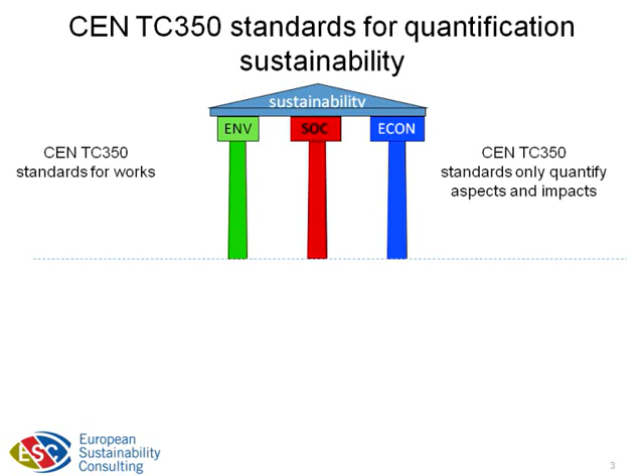But first this. If a building doesn't meet the needs for use, then the building and all products and materials in the building envelope and inside cannot be sustainable. Sustainability also starts with fulfilling the basic work requirements. The European Construction Products Regulation 305/2011 defines 7 basic work requirements.

If, for example, the first basic work requirement, mechanical resistance and stability, is not fulfilled, the building collapses or deformations hinder the functioning of the activities in the building. Then all products used in the building construction and in the building interior are no longer sustainable.

If the building or part of the building, for example, catches fire because basic work requirement number 2, safety in case of fire, is not fulfilled, all sustainability efforts for building and products become worthless. So, sustainability starts with the basic work requirements, with a good functional and technical design and construction.

But once the functional and technical design is made and realized, this has an impact on the environment, on the society and on the economics. Sustainability is based on the solutions for meeting the functional and technical needs measured in 3 dimensions: environmental performance, social performance and economical performance. The CEN TC350 standards allow measuring on these 3 dimensions of sustainability.

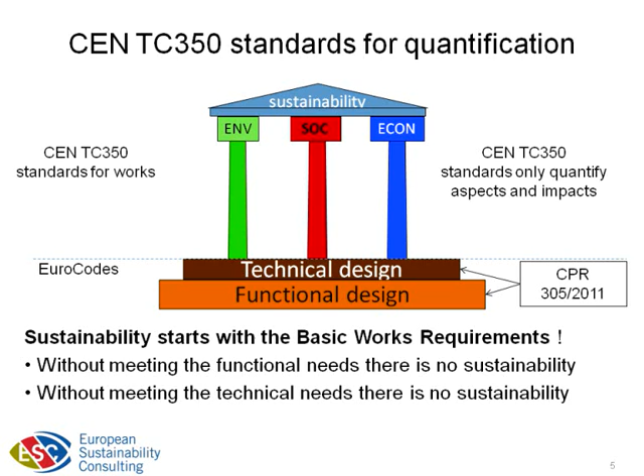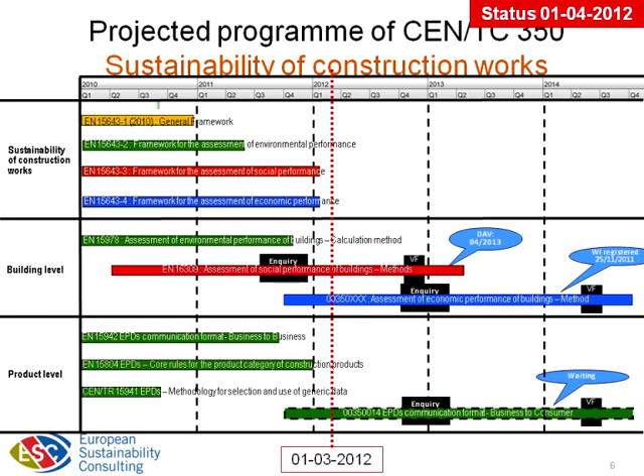The standards do not define what is sustainable and what not. They do not classify or give ratings, they only quantify. As of March 2012, there are 8 standards published. The Standardization Committee CEN TC350 is still working on 2 standards, the methodology for quantifying the social performance of buildings and the standard with the methodology for quantifying the economic performance of buildings. One work item, developing a standard defining the business to consumer communication, is not yet activated.

More in detail, all 4 framework standards are published. The standard EN 15643 Part 1 is an overall general framework standard for the sustainability assessment of buildings. This standard provides a framework with principles, requirements and guidelines for the sustainability assessment of buildings. It focuses on the general principles and requirements for the assessment of the environmental performance, the social performance and the economic performance of a building.

This standard, EN 15643, is part 2 of the framework standards. It provides principles, requirements and guidelines for the assessment of environmental performance of buildings. In the drafting of this standard, the ISO standards 21930 and 21931 Part 1 have been taken into consideration.

The third framework standard in the suite of European standards provides the specific principles and requirements for the assessment of the social performance of buildings. Assessment of social performance is one aspect of sustainability assessment of buildings under the general framework standard EN 15643 Part 1. And then there is part 4 of this suite of European standards. EN 15643-4 provides a framework with principles, requirements and guidelines for the assessment of the economic performance of buildings.

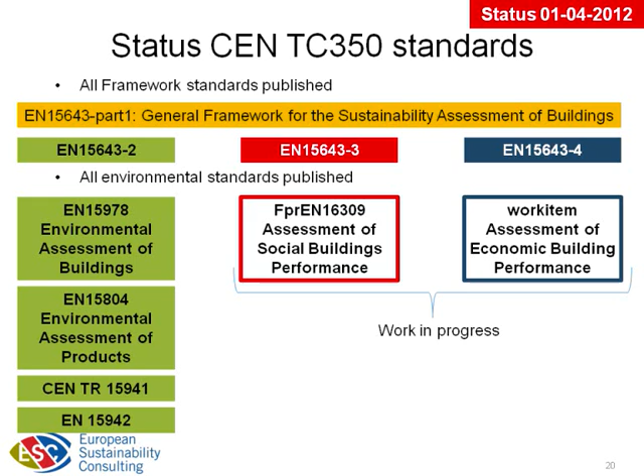And then, under the framework standard 15643 part 3, for the assessment of the social performance of buildings, there is the methodology standard, the document 16309. And under the framework standard 15643 part 4, there is the methodology standard for calculating the economic performance of buildings. Both work items are progressing well, but publication is scheduled for 2013, respectively for the year 2014.

I want to highlight a basic principle applied in the CEN TC350 standards. All aspects and indicators that are to be calculated shall serve the sustainability assessment of the building. No data on products that have no use for evaluating the building performance. The building therefore defines what data are needed. This principle also structured the suite of standards of CEN TC350.

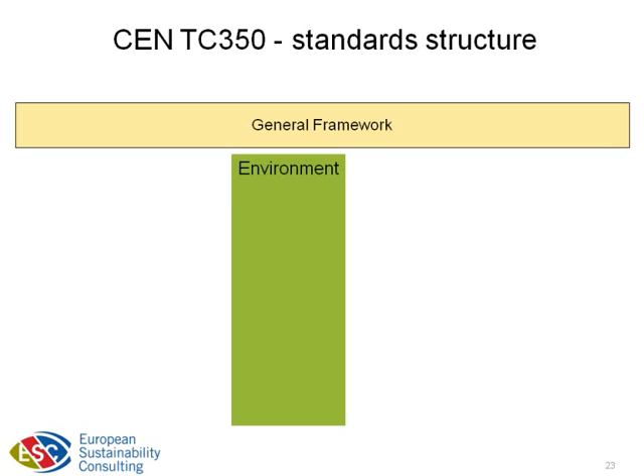On top there is the general framework setting the basic principles applying to the standards to measure the 3 dimensions of sustainability: the standards dealing with the environmental performance, with the social performance and with the economic performance. To organize the specific environmental, social and economic principles, there is a level of specific framework standards. Then the level with the standards that specify the methodologies for calculating the building performance on the 3 dimensions are perhaps the most important standards.

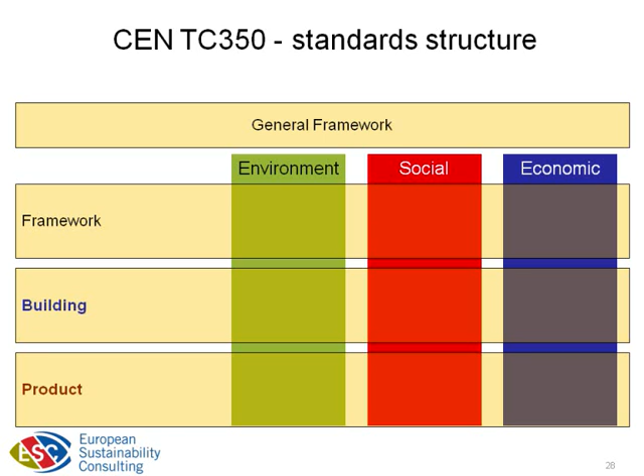But for this we need data on products, especially on their environmental performance, for aggregating them into the building performance. As mentioned before, the building defines if and what data are required for the 3 dimensions of sustainability. So the hierarchy is top-down, the data flow is bottom-up.

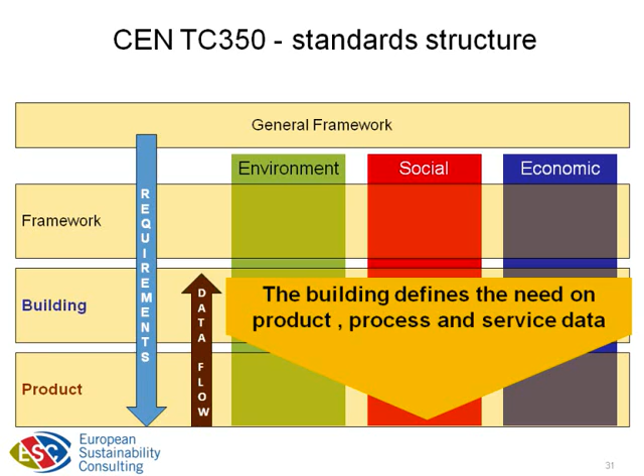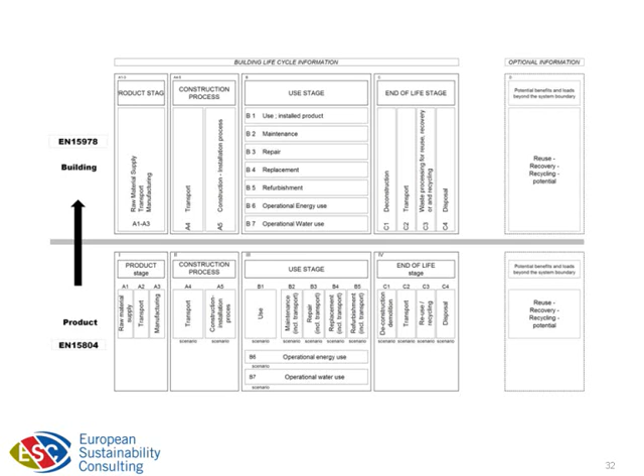The 2 standards, EN 15804 for the product assessment at the bottom, and above it the standard EN 15978 for the environmental building assessment, calculate and quantify the environmental performance per information module. The information modules for the product correspond with the building modules. Once more, the principle: the building defines what data information should be supplied from the construction products. The product manufacturer supplies an EPD, an environmental product declaration, for his product.

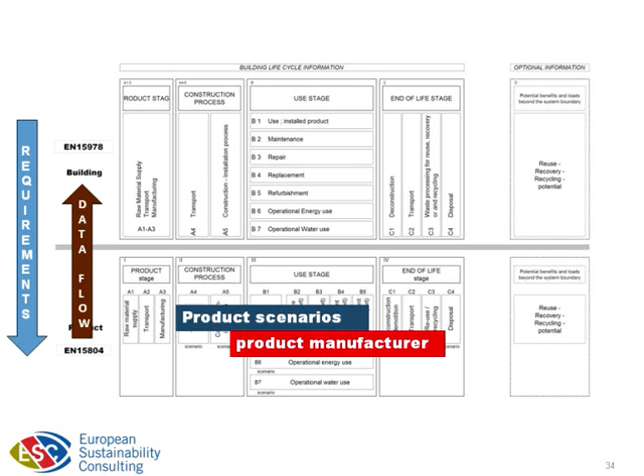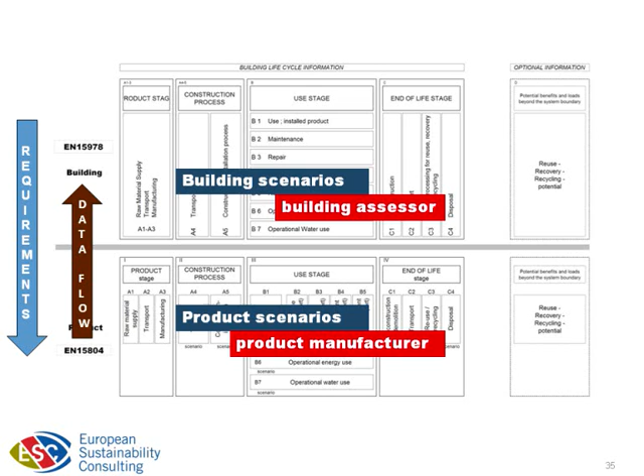Per life cycle stage, per information module, the manufacturer declares the environmental performance on 22 environmental indicators, but always based on a scenario. It's the manufacturer who specifies the scenario. On the building level, the building assessor also specifies scenarios for each information module in the life cycle stage of the building. Of course, the product and the building scenarios should be aligned. In the building assessment, the product scenarios have to meet the scenarios for the building. If not, the assessor has to adjust the respective environmental values for the product.

If you want to learn more about the standards of CEN TC350, see also the CEN web. More information on working with the standards is available in more YouTube videos in this series, amongst others on who made the standards, on the modularity and on scenarios, on the confidential lifecycle inventory data and EPD, and on waste and secondary products and more.